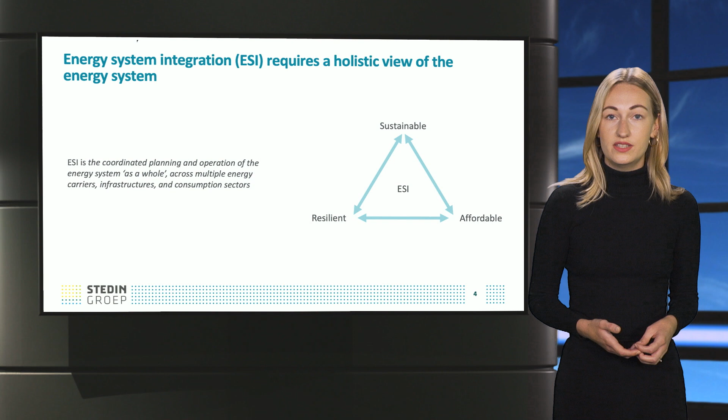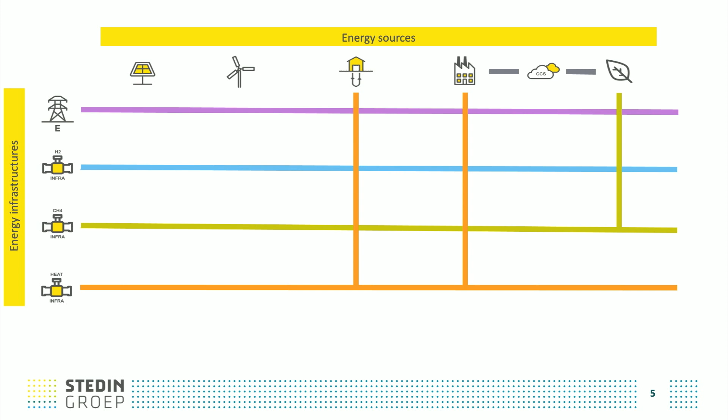The following picture is a simplified representation of the energy system. Let's assume we have 4 different types of energy carrier networks: electricity, hydrogen, a methane-based gas, such as biogas, and heat. These networks can be used to transport energy from an energy source to energy demand for different sectors. To balance supply and demand in the system, storage is added for each of the energy networks.

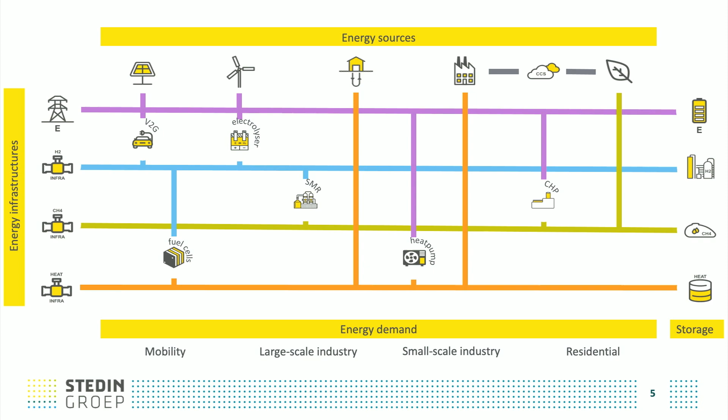Traditionally, networks of the different energy carriers interacted minimally. Adding new technologies such as electrolyzers, which are able to convert electricity to hydrogen and back again, or heat pumps, which are able to provide heat to households by using electricity, allows for coupling of energy infrastructures. As the name indicates, system integration is about connecting the different elements of the energy system. As the energy system encompasses many layers, integration occurs on different levels.

The first type we consider, as demonstrated by the different technologies in the previous slide, concerns the integration of energy carriers and infrastructures. Second is the integration of different production and end-use sectors, also referred to as sector coupling. Using batteries of electric vehicles as battery storage to relieve congestion integrates the electricity sector with the mobility sector, 2 sectors which were previously separated. Another example is the use of residual heat from industry to heat households nearby. There are many more examples of sector coupling opportunities.

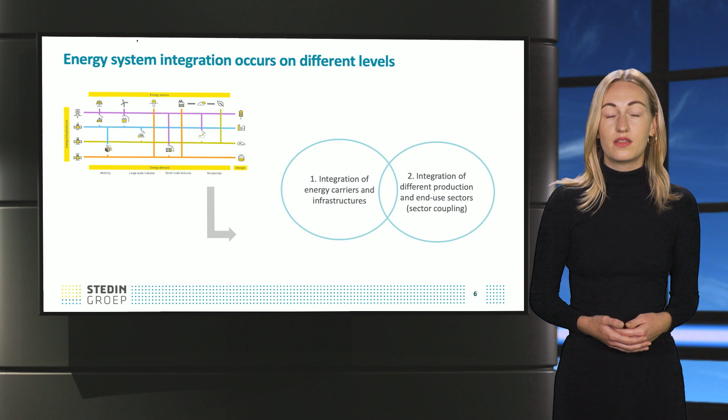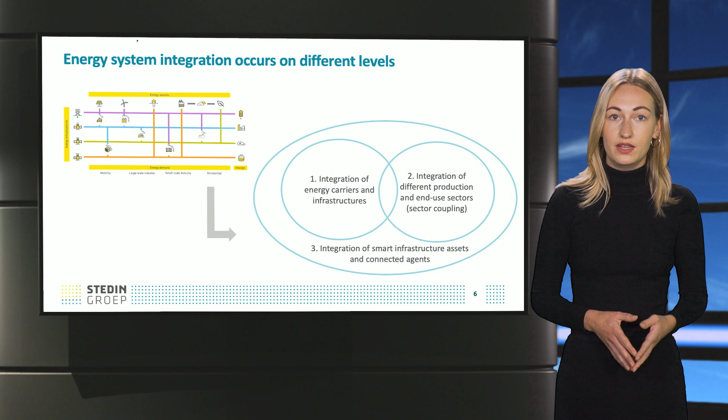Third is the integration of smart infrastructure assets and connected agents. This concerns the most complex form of energy system integration, whereby the entire system interacts with other elements in the system. As a result, smart assets within the system should be able to interact autonomously with other assets, but also agents such as businesses and consumers, to optimize based on a system level rather than individually. This requires a completely digitized system.

As I mentioned before, system integration is about creating synergies between the different elements to optimize the system for a certain goal. To make this a bit more concrete, I have defined 3 common objectives of energy system integration into use cases, which are: first, to accommodate the integration of variable renewable electricity generation and reduce the system's CO2 footprint. Second, optimize infrastructure investment and operation cost. And third, improve customer business cases. We will walk through examples of each of the optimization use cases.

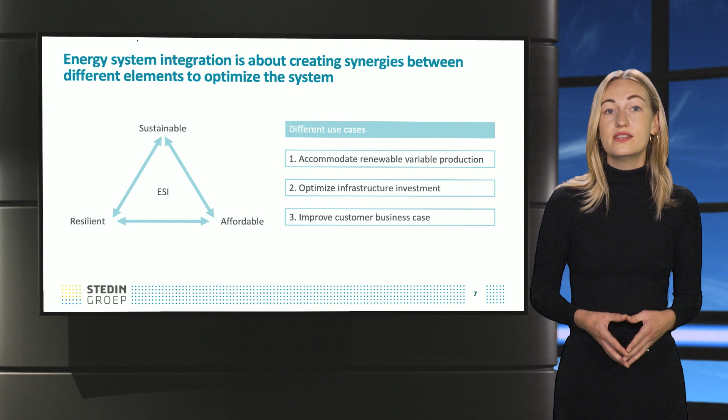Renewable electricity sources such as wind turbines and solar panels are so-called variable electricity sources, of which production is dependent upon prevailing weather conditions. As a result, electricity supply has become less stable, making it more difficult to balance supply and demand, possibly resulting in power system outage.

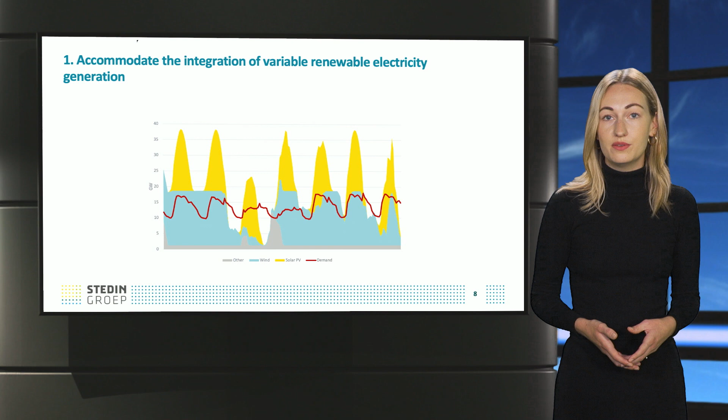In winter, when electricity demand is generally higher than supply, this hydrogen could be converted back to electricity to be used in, for example, electric heat pumps. As such, energy system integration allows for balancing energy supply and demand in the system.

In addition to balancing problems, the electricity system is also experiencing capacity problems due to a number of reasons. One of the reasons is the decentralization of electricity production. Unlike traditional power plants, which due to their scale were established in centralized locations, small-scale wind projects or solar fields are emerging in various locations in the grid.

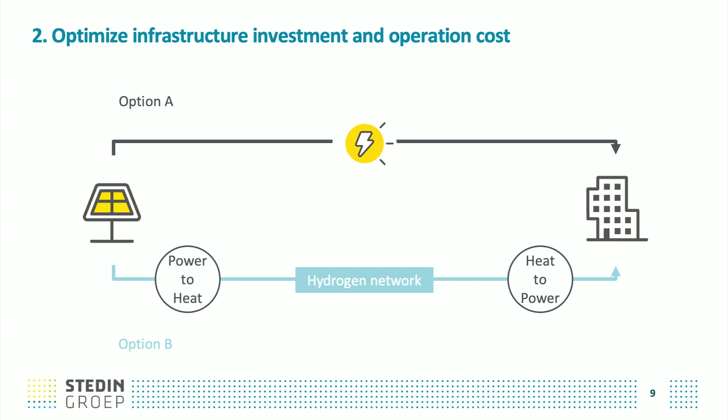Another option, option B, is to convert locally generated solar energy to hydrogen and distribute the energy through the gas grid rather than tapping into the electricity grid. This could postpone or even avoid infrastructure investment costs for grid operators. As such, energy system integration can help optimize utilization of existing infrastructure assets and reduce system cost. In the next video in this online course, we will discuss the role of hydrogen in energy system integration in more detail.

If a household in possession of solar panels and an electric vehicle were to charge its electric vehicle at time of peak solar panel production, it will be able to increase the consumption of its production.

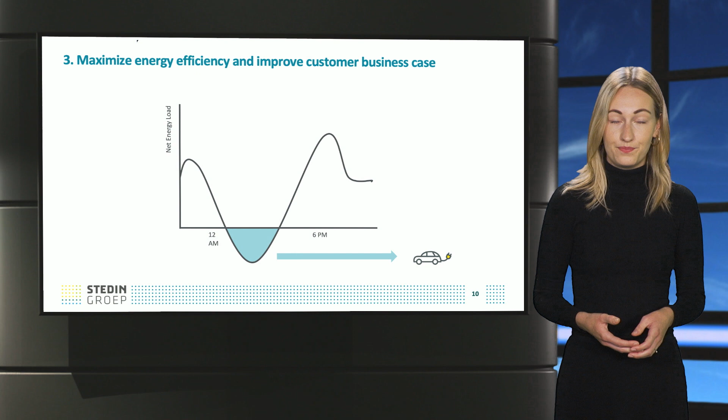We will conclude with some key takeaways. Energy system integration comprises a holistic view of the energy system, whereby different energy carriers, infrastructure, and consumption sectors are regarded as a whole. Integration of these different elements aims to increase the level of sustainable energy technologies, strengthen system resilience whilst reducing system cost.

Energy system integration is therefore used to optimize the system based on these objectives, and can be a driver for new business models. In the next video, we will take a closer look at the hydrogen economy and its potential to fuel the energy system of the future.